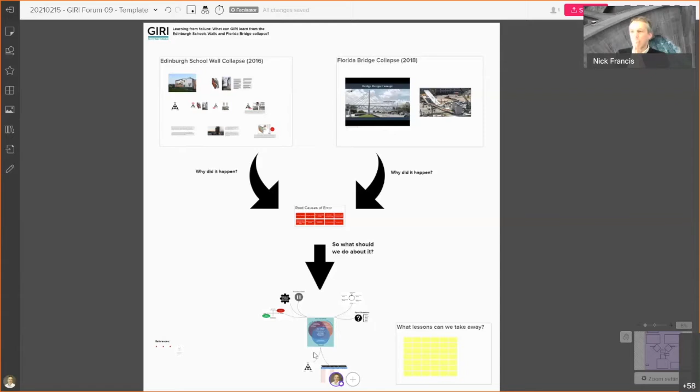So let's start by diving into the Edinburgh School wall collapse. Now, this is a bit of a poison chalice, because I have no doubt there are several people on the call who will have intimate and expert knowledge of this, possibly involved with it personally. So I'm going to try very hard to stick strictly to what has been stated in the SCOS report and the various other reports. However, we have the chat box running, so if you know something from personal experience about this project, please add it to the chat so everyone can see and we can share in your knowledge.

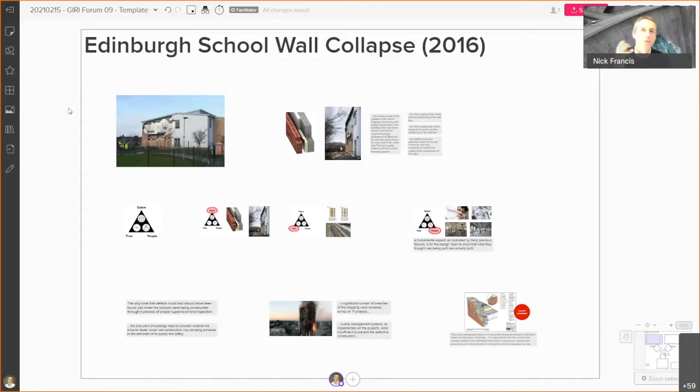I'm sure you're all very aware, at least in outline, of this disaster. In 2016, Oxgangs Primary School up in Scotland, during high winds one night, virtually all of this masonry wall fell down, collapsed into the playground. This area alongside the wall is where the children line up to go through that door, so had this happened during the school day, this could have been a seriously bad disaster. It's only luck that meant nobody was killed, because it happened at night.

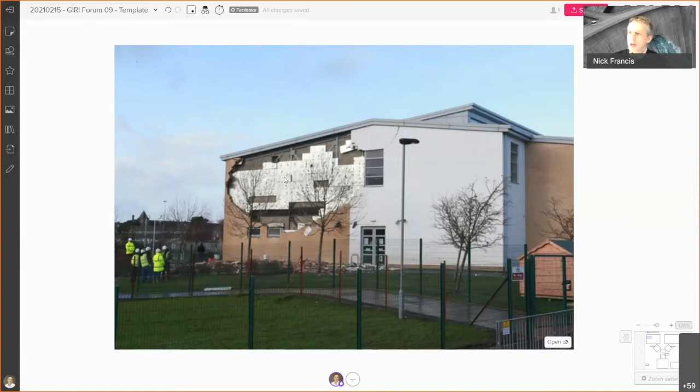So let's look at what actually happened. This is a completely standard type of construction: a blockwork and brickwork wall, blockwork on the inside leaf and brickwork on the outside leaf, tied together with brick ties every third course of bricks, so every one layer of blockwork. In between the bricks and the block you've got the insulation panels. I'm sure you're all thoroughly familiar with this. We can see the blockwork on the inside, the insulation panels, these red dots where we've got what's left of the wall ties, and then the brickwork on the outer face.

Now, a number of things went wrong to lead to this collapse, but essentially it came down to the fact that these brick ties were not holding the outer leaf in place. One element was that a decision was made to build the inner leaf, the blockwork, first, so they could get on with fitting the inside of the building and make it watertight. What that meant was that the courses didn't go up at the same time, so several of the courses weren't aligned properly, and the brick ties couldn't all be connected in.

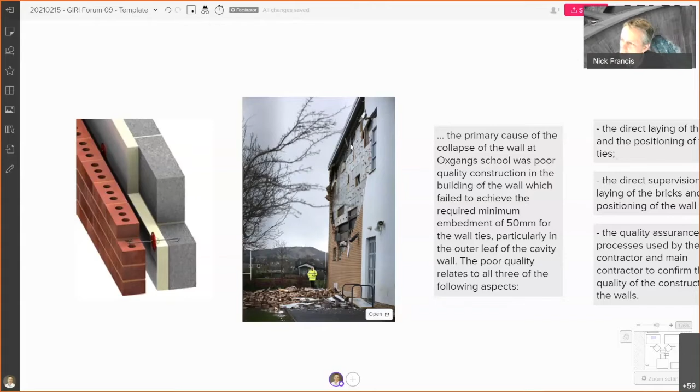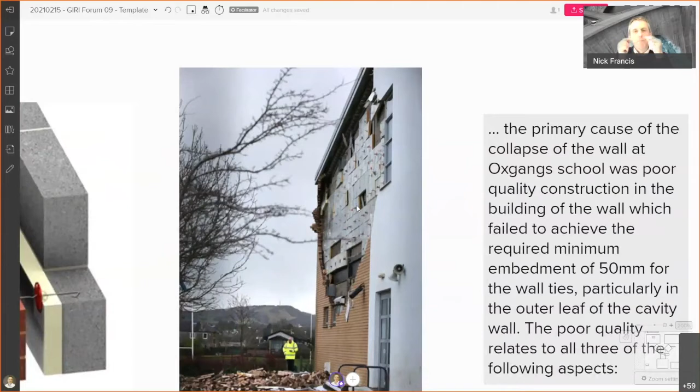You can also make out from this picture, if I zoom in, that there's diagonal bracing inside the steel frame, so wherever that bracing clashed with the brick ties, there weren't any ties there. In some places, the insulation was wider or thicker than planned, so it didn't have the right embedment on the brick ties. There were a whole host of different reasons why we ended up not having the brick ties embedded enough. Let's have a look at some of the words from the report.

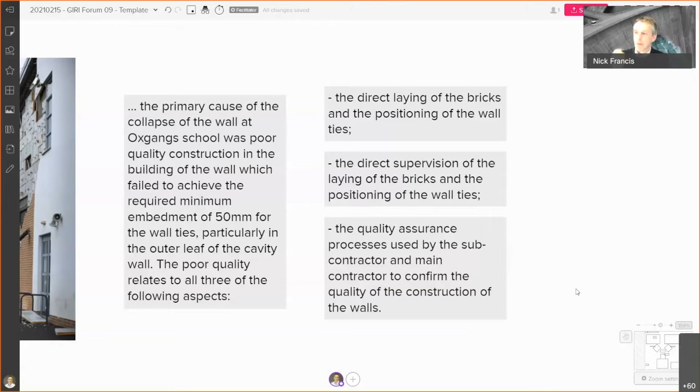The primary cause of the collapse of the wall at Oxgangs School was poor quality construction in the building of the wall, which failed to achieve the required minimum embedment of 50 millimetres for the wall ties, particularly in the outer leaf of the cavity wall. The poor quality relates to all three of the following aspects: 1, the direct laying of the bricks and positioning of the wall ties; 2, the direct supervision of the laying of the bricks and positioning of the wall ties; and 3, the quality assurance process used by the subcontractor and main contractor to confirm the quality of construction of the walls.

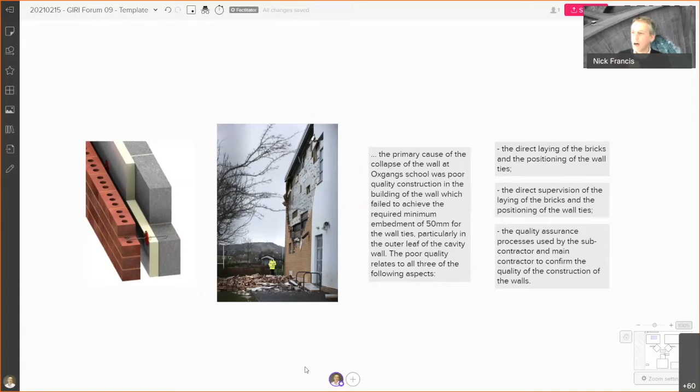The consequence of this has been that all schools constructed, over a long period under the same contract, had to be investigated. Last I heard, the cost of all those investigations was running at somewhere around £350 million - that's the direct cost of trying to rectify these errors. 17 schools were closed for a prolonged period after this collapse, and it raised concerns over lots of other structures built over the same period.

Now I want to zoom in and consider something we look at in our interface courses, what we call the interfaces triangle. When we have an interface, we can think of a physical interface - for example, how the bricks tie in with the brick ties, or how a pipe clashes with a beam. We call that the spatial element of interface. But you've also got the people element - who is interfacing with who, what organization interfaces with what organization. And you've also got the time element of interface - what has to happen in what order, what decisions have to be made before other decisions.

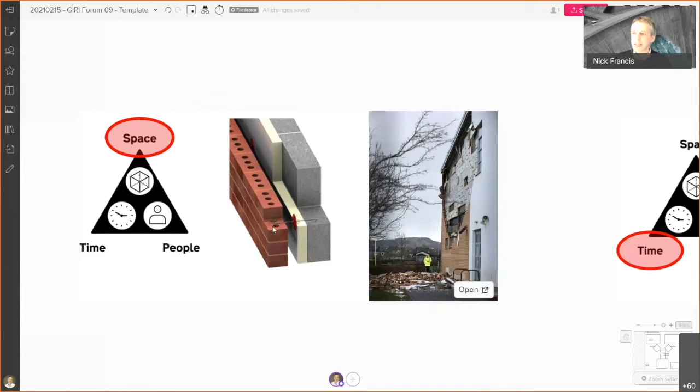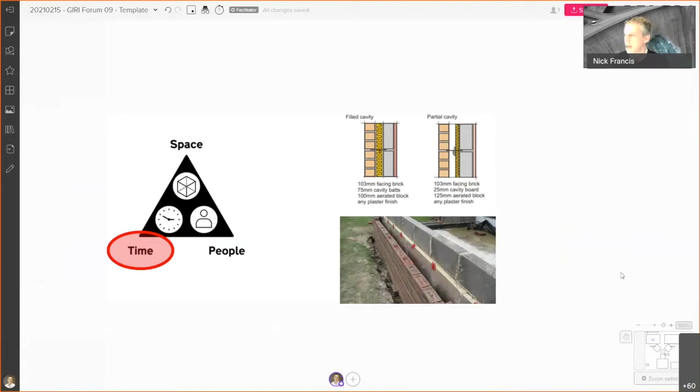So let's reflect on that for this wall collapse. Let's look at space - well, we've already seen there's a space element, the blockwork didn't align and these weren't embedded enough, fairly fundamental. Let's look at the time element - we've already heard the sequencing, the order that work was conducted, had an impact. And what about people? This is a quote from the report: 'A fundamental aspect, as illustrated by many previous failures, is for the design team to know that what they thought was being built was actually built.' So it wasn't that this was designed wrong, but because of the different groups of people, it wasn't clear who was doing what.

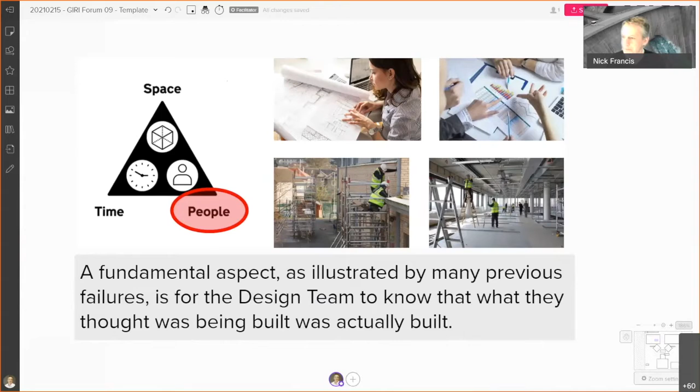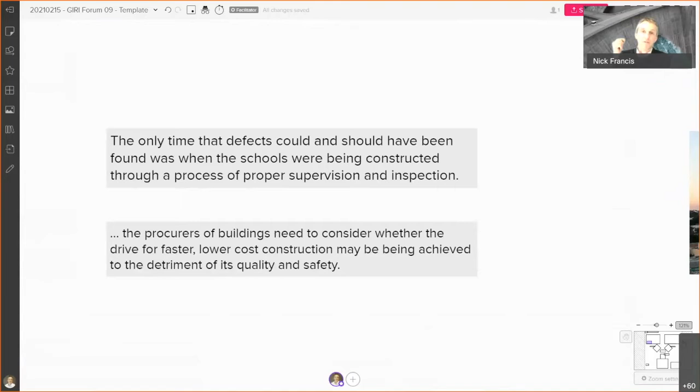Let's look at some of the consequences of this, or other considerations from the report. It said the only time the defects could have and should have been found was when the schools were being constructed, through a process of proper supervision and inspection, and the procurers of buildings need to consider whether the drive for faster, lower cost construction may be being achieved to the detriment of quality and safety. Something quite pertinent at the moment is that the report also found a significant number of breaches of fire stopping were revealed across all of the 17 projects - the schools that were shut - and quality management systems as implemented on the projects were insufficient to prevent the defective construction.

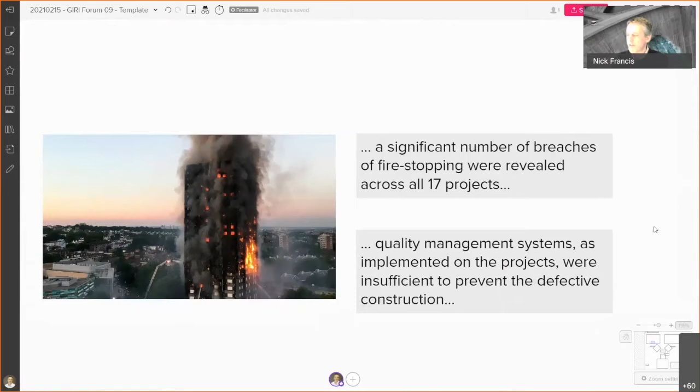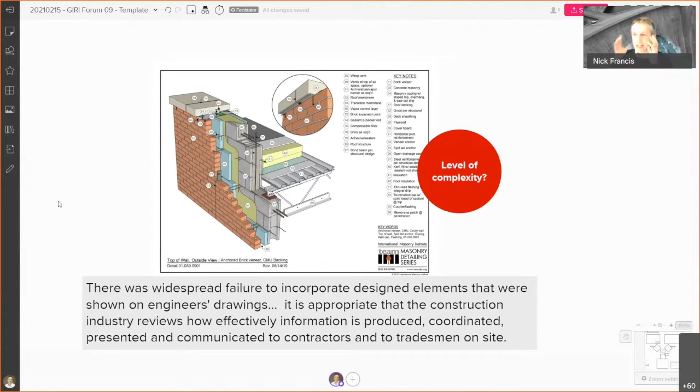The final thing I'll bring up when thinking about this collapse - this is a standard detail, taken from the International Masonry Institute, so it's not from this job, but it is a standard detail for the type of construction we were looking at: block work, brickwork with insulation in between. The thing I'd highlight is just how complex this is. This is a very normal bit of construction, but just look at the complexity in that detail.

A quote from the report said there was widespread failure to incorporate designed elements that were shown on engineers' drawings. It's appropriate that the construction industry reviews how effectively information is produced, coordinated, presented, and communicated to contractors and tradesmen on site. Interestingly, that ties in exactly with one of the top root causes of error, which is poor communication of design information.

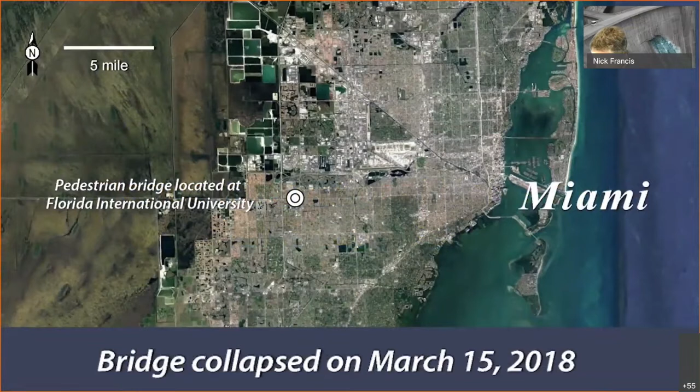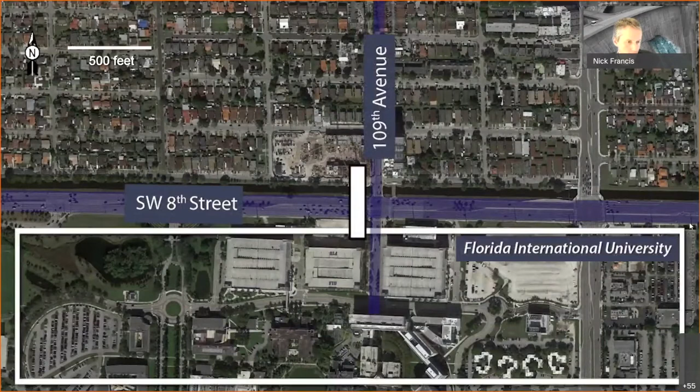On Thursday, March 15, 2018, the Florida International University pedestrian bridge collapsed, killing 6 people and injuring 10 more. The collapse occurred 11 miles west of downtown Miami in Miami-Dade County, Florida. The Florida International University pedestrian bridge was located on the west side of the intersection of Southwest 8th Street and 109th Avenue. The elevated pedestrian bridge would have connected the university with the city of Sweetwater by extending over Southwest 8th Street and the parallel running Tamiami Canal.

The first section of the bridge constructed was the span across 8th Street, and that was the section that collapsed. The bridge section was built on the ground in a construction yard adjacent to the roadway, and then moved onto support piers using 2 self-propelled modular transporters.

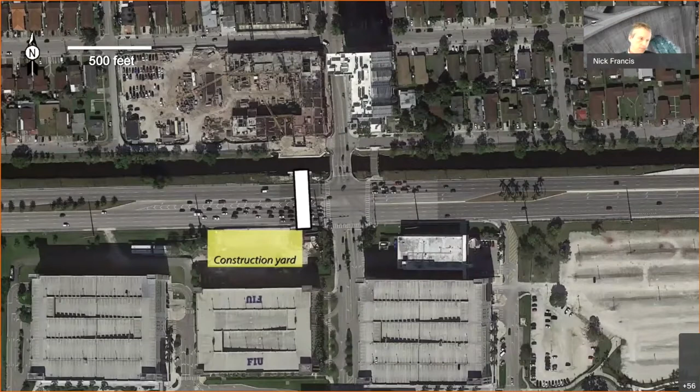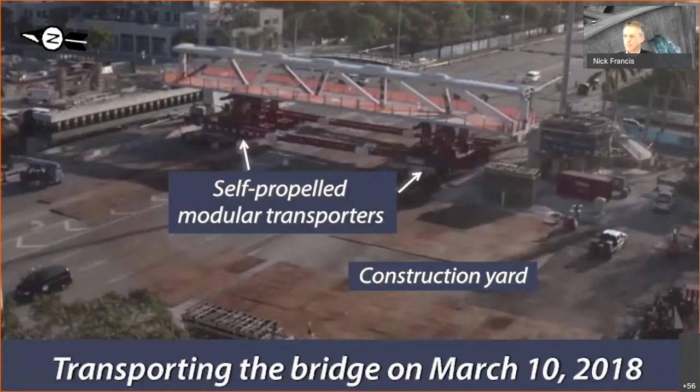Building the bridge alongside the road before moving it into place is a construction process called accelerated bridge construction, which reduces on-site construction time and minimizes traffic impact.

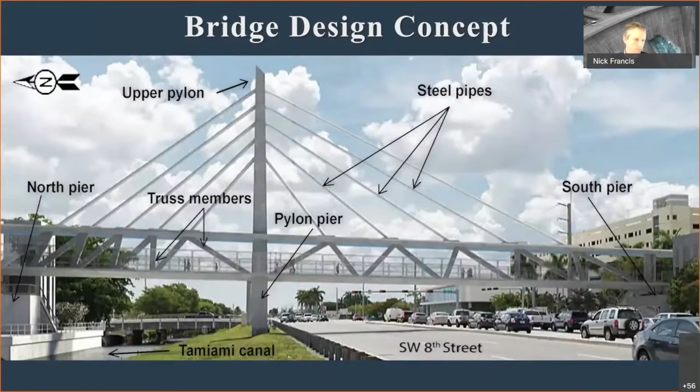The overall conceptual design had the appearance of a cable-stayed bridge. However, the central pylon and steel pipe stays were not load-carrying structural elements. Instead, the functional design was a truss structure that was unusual for being constructed out of reinforced concrete and also for having the truss members aligned in a single plane.

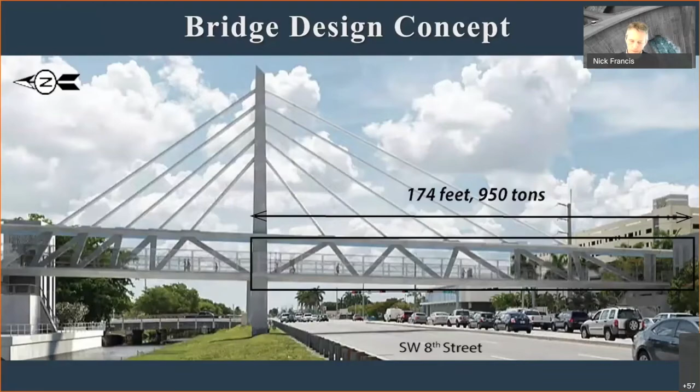The bridge section that spanned Southwest 8th Street was 174 feet long and weighed 950 tons. It contained a deck, vertical and diagonal truss members, and a canopy. The truss members were numbered 1 through 12 starting from the south end of the bridge.

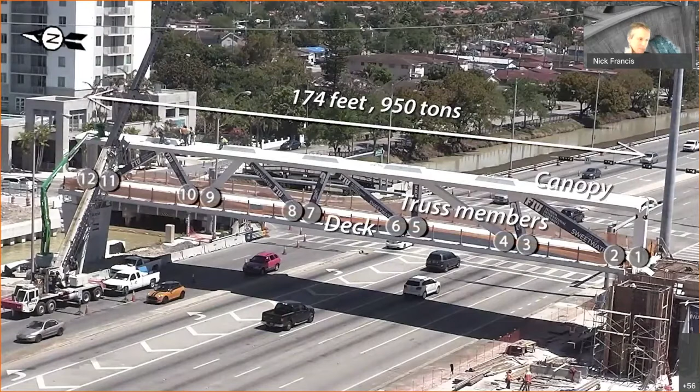The design of the bridge was non-redundant, meaning that failure of an individual truss member would cause collapse of the bridge.

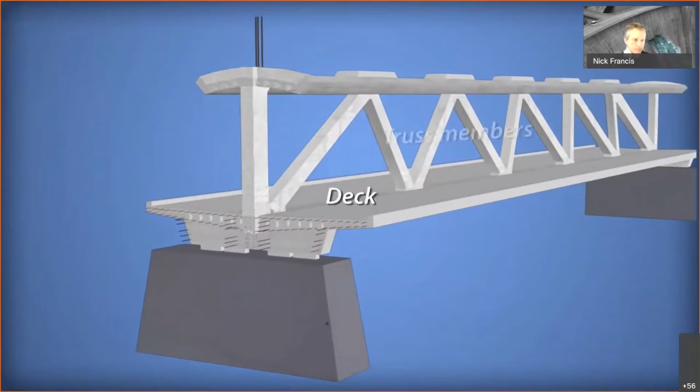The concrete for the section was poured in 3 stages: first the deck, then the vertical and diagonal truss members, and finally the canopy. Separate pours formed discontinuities in concrete structures called cold joints. In this bridge, cold joints were located between the deck and the truss members, and between the truss members and the canopy.

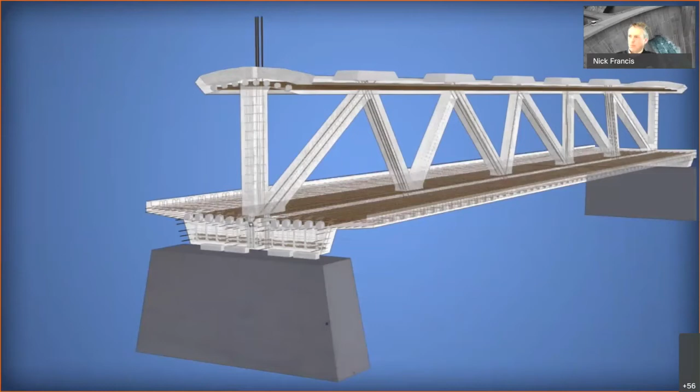Within the concrete, reinforcement was provided by steel bars and larger diameter steel post-tensioning rods. These rods were pulled in tension and locked into place after the concrete had cured in order to ensure that the concrete was loaded in compression. The post-tensioning rods and steel reinforcing bars were to carry the tension loads of the completed bridge.

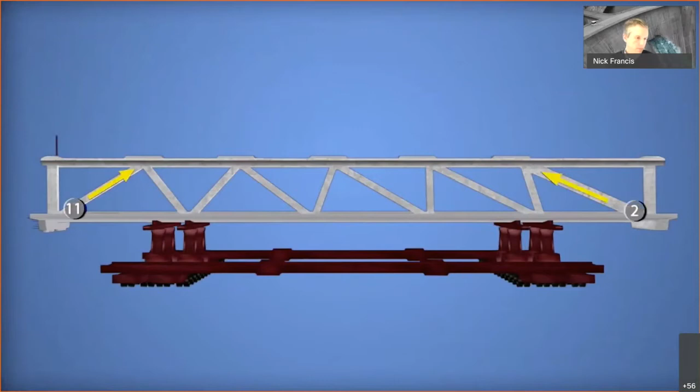Before the bridge was moved onto the piers, truss members 2 and 11 were post-tensioned in the construction yard, to counteract the tensile forces developed while the ends of the bridge hung over the transporters when the span was moved.

After the bridge was placed onto the piers, truss members 2 and 11 were under compression, and the post-tensioning rods were detensioned.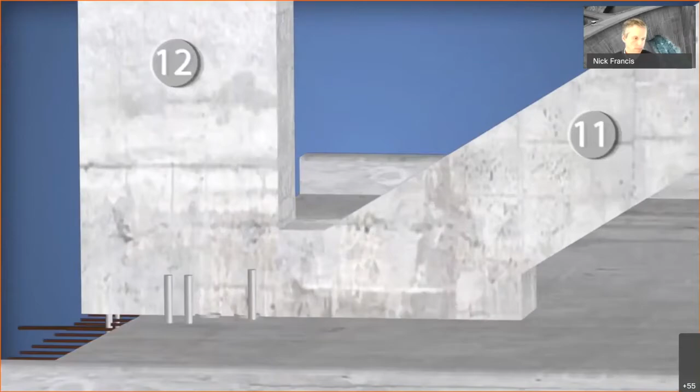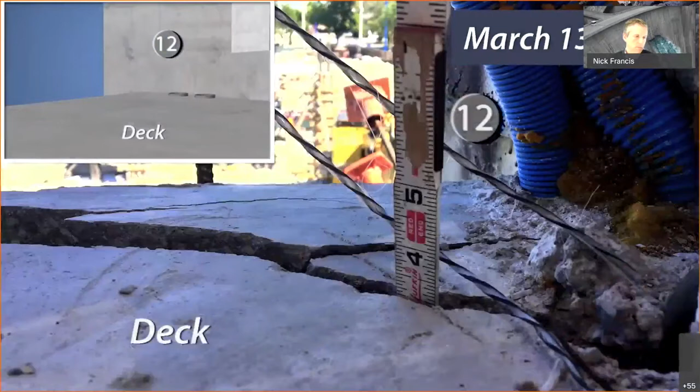Before the bridge section was moved into position on the piers, cracks were observed in the concrete at and adjacent to the cold joint between the deck and members 11 and 12. The cracking got worse once the bridge section was placed on the piers. These cracks continued to grow over the next 5 days, and numerous photographs documented the progressive cracking in the structure.

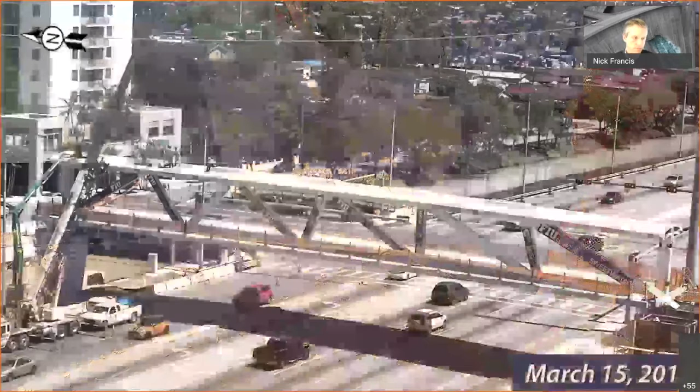In response to the cracking, a decision was made on the day of the collapse to retension the steel rods in truss member 11. Workers were retensioning member 11 when the collapse occurred. The road was not closed while this work was taking place.

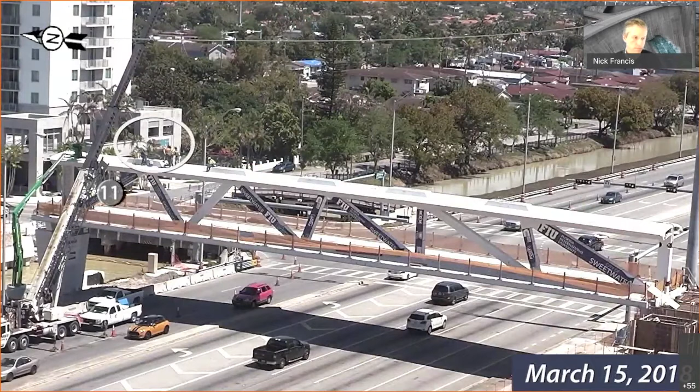The bridge section was placed onto the piers on the morning of Saturday, March 10, 2018. It collapsed 5 days later on the afternoon of Thursday, March 15, 2018.

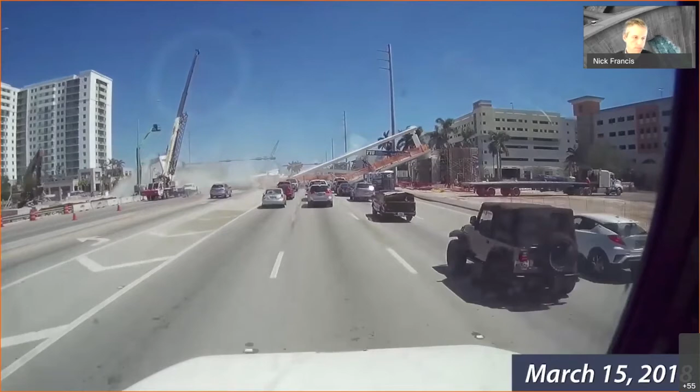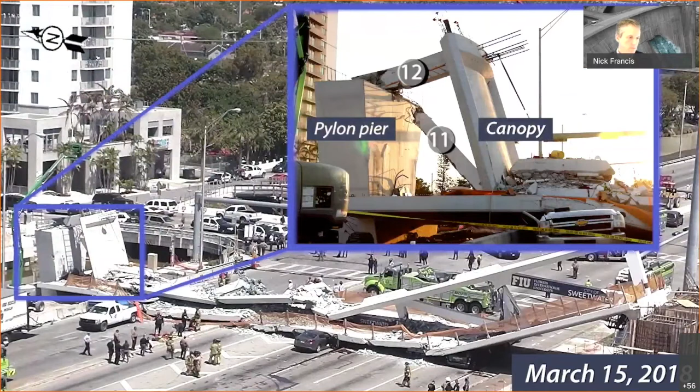The collapse began at the north end of the bridge, initiating at the cold joint between the deck and truss members 11 and 12. Large shear forces and insufficient reinforcement across the cold joint at this location led to the steadily growing cracks and structural failure.

One bridge worker was killed in the collapse, as were 5 people in vehicles under the bridge. 5 bridge workers and 5 other people were injured.

Okay, I find that quite fascinating, that video. I don't know if any of you have seen it before, but some pretty stark lessons there.